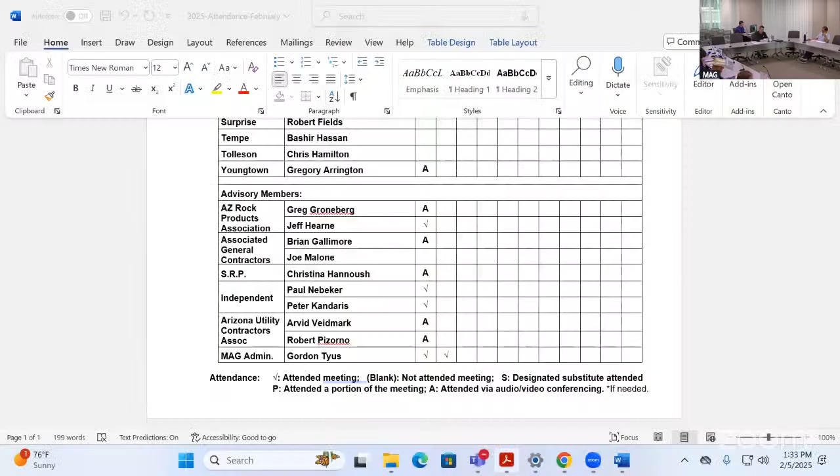We'll move into agenda item number 2, the call to the audience. This is an opportunity for the public to comment on items that fall under MAG jurisdiction that are not on the agenda, informational items, or items on the agenda for discussion and not for action. 15 minutes are provided for the call to the audience unless the chair requests an exception. I have not received any requests to speak for the call to the audience.

MAG also provides an opportunity for members of the public to submit written comments via the MAG website. Any comments received 2 hours prior to the meeting are shared with the committee members in advance for consideration and will be included in the formal meeting minutes. Gordon, have you received any written comments? We did not receive any online written comments. Thank you.

Moving into agenda item number 3, the approval of the January 8th, 2025 meeting minutes. Gordon will pull those up. Refresh your memory if you have any comments or questions, or notes you want to make regarding the meeting minutes. Now's the time to let us know.

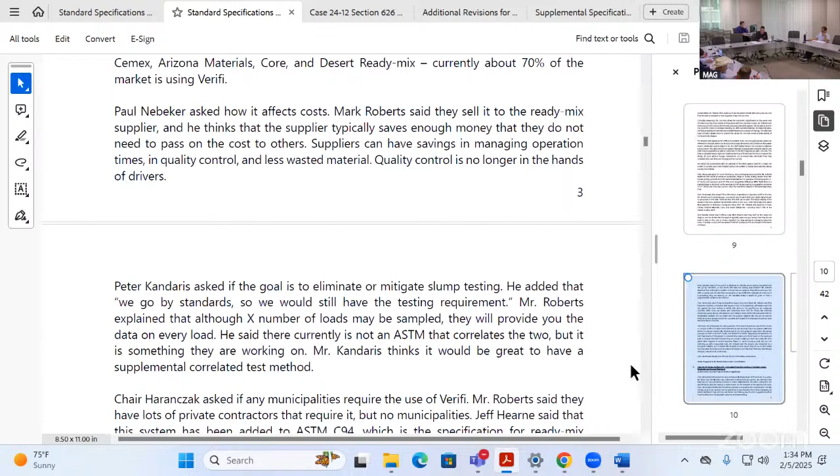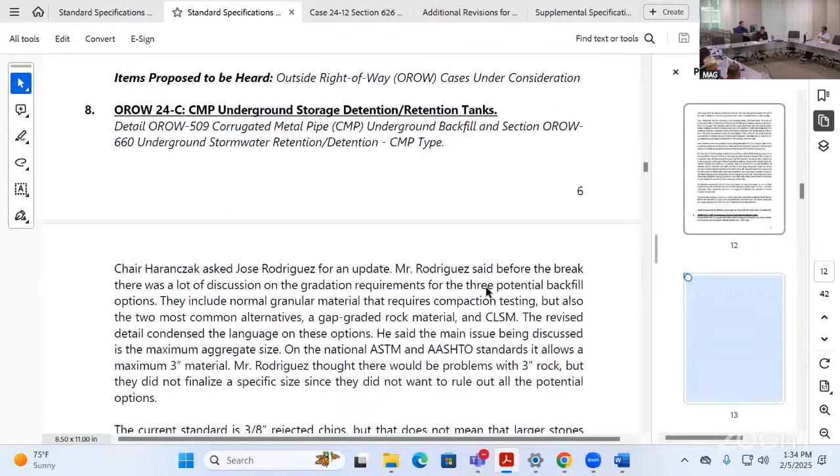I haven't received any public comment on the meeting minutes. Gordon, did we receive anything online? No. Perfect. I'm not hearing any comments on the meeting minutes or any corrections that need to be made. With that, I'll entertain a motion to approve the meeting minutes. This is Warren, I'll motion to approve. Thank you, Warren. Can we get a second motion on agenda item number 3, please? This is Roy, I second. Roy, thank you. With that, we can move into a roll call vote.

Thank you, let's start with ADOT. Yes. Avondale. Avondale's not present. Buckeye? Good afternoon, this is Josh Ford. Yes. Thank you, Chandler. Yes. El Mirage. Yes. Florence. Gilbert, yes. Glendale, yes. Goodyear, yes. Maricopa County, yes. Mesa, yes.

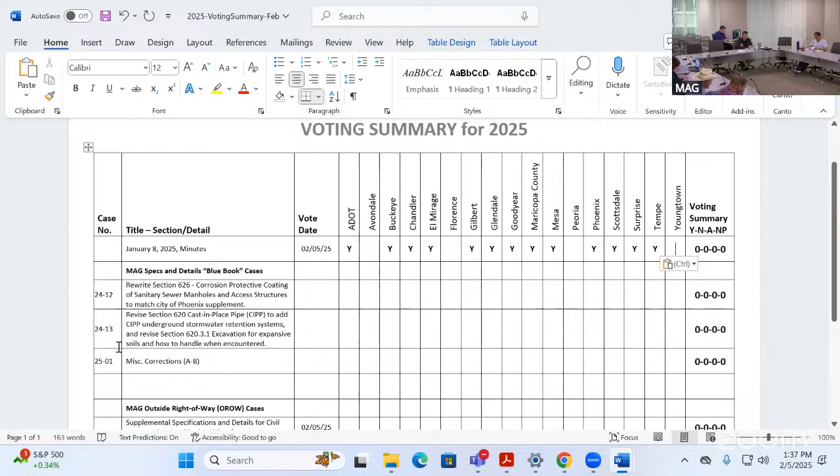All right, we'll move into agenda item number 4. This is cases carried forward from 2024. The first case is 24-12, revisions to section 626 for the corrosion protective coating of sanitary sewer manholes and access structures.

This one in particular, unfortunately, Phoenix wasn't able to make the working group meeting to discuss this. So Jim Badowich and myself had conversations with the Phoenix staff and went over all the Glendale comments. They're going through those comments right now, and they're very small comments. Matthew, do you want to give an update on where you're at with the comments?

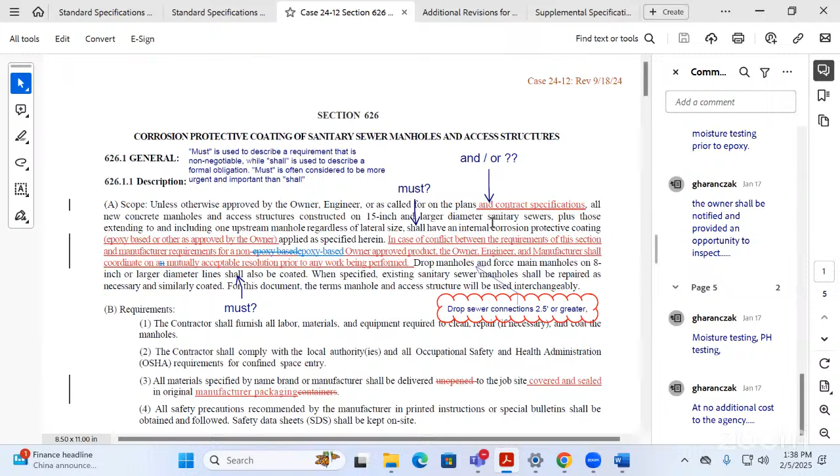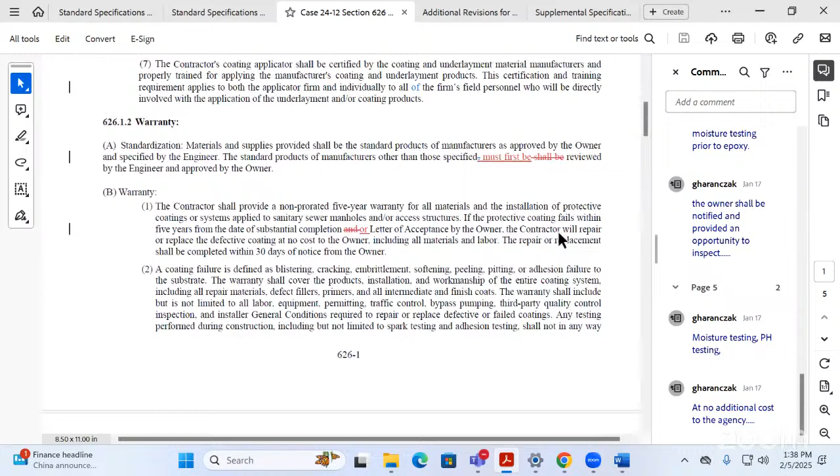Yeah, hello. We're still just revising all those that we had spoken about last week. I haven't heard anything back from Pat, but hopefully we should get a clean version here in the next couple of weeks or so. I did see the City of Chandler sent some of their comments through today, so I forwarded those over to Pat to get those revised as well.

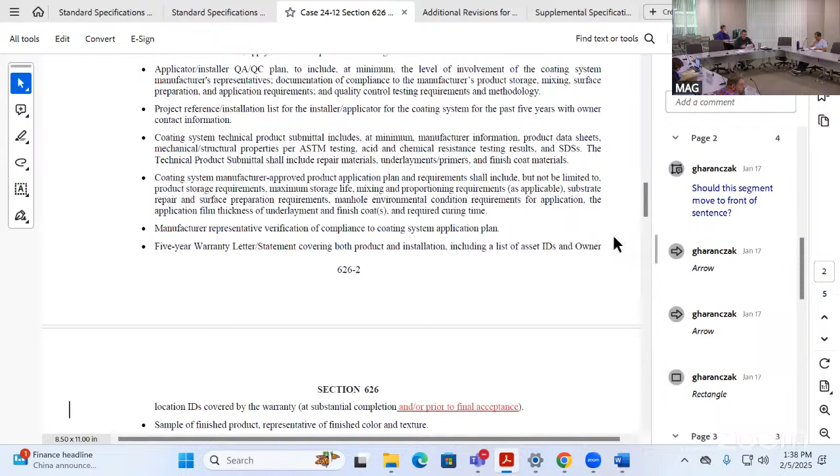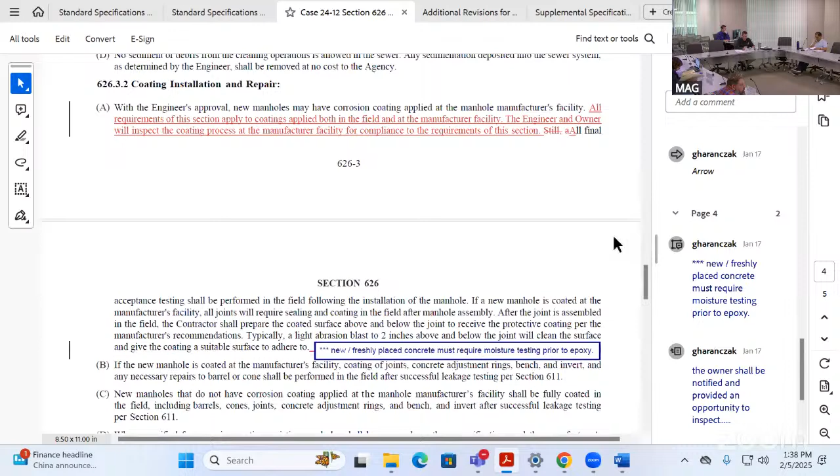Great, that was my next comment, as I saw Warren sent some stuff from their team. Wanted to make sure you got that. Sounds like you did. This one in particular, I think at this point, Matthew, it seems like you're just polishing it up. It's pretty close to going. I think if we can get this in front of the committee this month, the sooner the better, obviously.

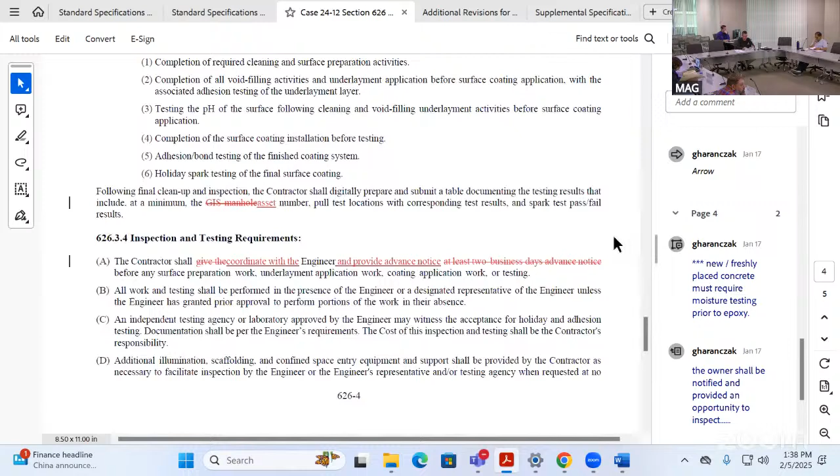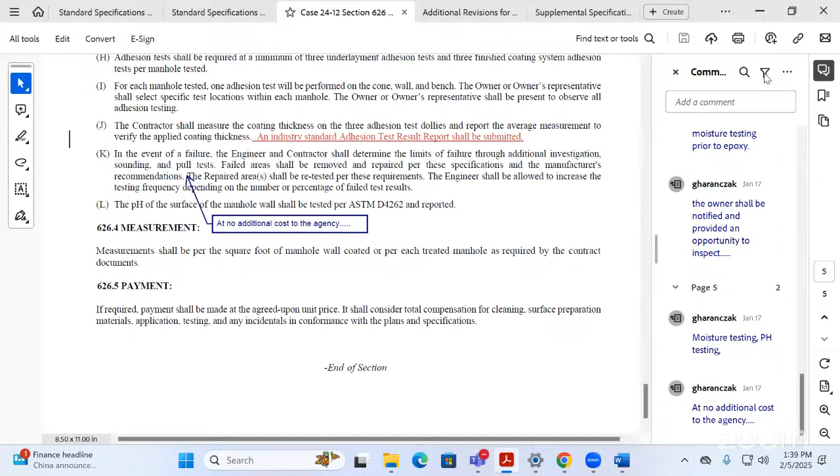We can open it up for discussion at the next meeting. We'll have the working group discuss it, and then we'll open it up for discussion at the next meeting. I think we could potentially put it as action, but definitely in April I think it could be up for action. Yes, I agree with you. Thank you. Any questions or comments anybody wants to make on case 24-12 while we're on this agenda item?

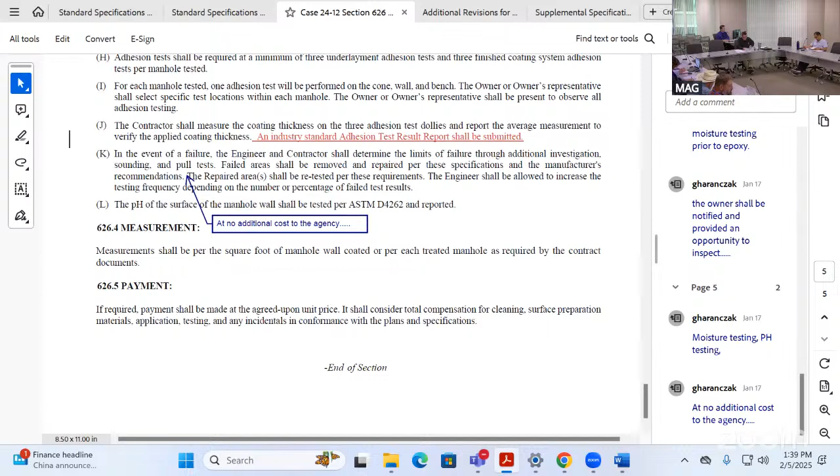All right, hearing none, we're going to move to agenda item number 5. This is case 24-13, proposed revisions to section 620. This is cast in place concrete pipe. We need to make a correction on the agenda. Gordon.

This is to revise section 620.1. It's brought to us by Warren. He's sponsoring this case with Chandler. Warren, do you want to provide any updates on this case?

Yeah, thank you. Good afternoon, everyone. I had submitted, not for the packet, but Gordon should have an update for the additional comments that we had, or the revisions, where basically just to clear up any potential confusion between the cast in place concrete pipe and cured in place pipe. So a few minor changes to section 101 abbreviations, section 618 storm drain construction, and then of course the current case 620, where it's just updating those abbreviations that are used there.

So that's the addition today. The other update is that Blue Corps has set up a meeting for February 13th with their geotech to readdress the ongoing discussions about what to do with the expansive soils. So we'll get that paragraph polished up. Hopefully we'll have that ready, and then we can talk a little more about it at the next water and sewer working group. So that's all I have to report on for today.

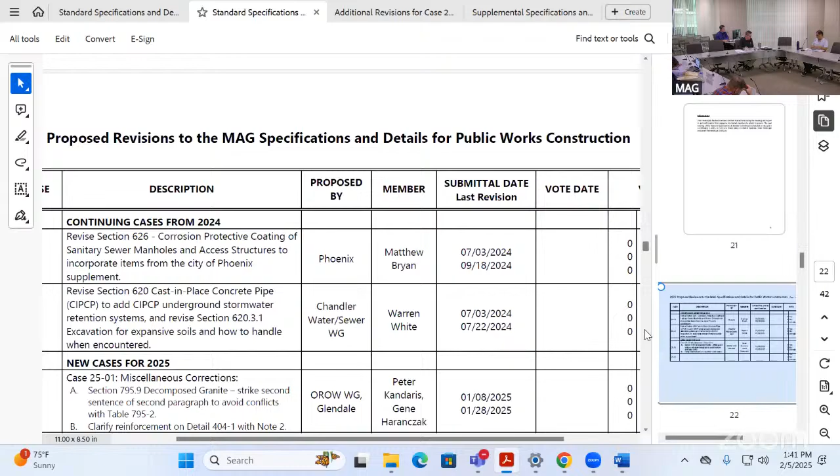All right, we'll move into agenda item number 6, new cases for 2025. We have some miscellaneous corrections. We do have a new miscellaneous correction, this would be for detail 404-1. It's not changing. That should be 404-3, I believe.

Is that correct, Warren? 404-3? Yeah, my agenda says 1, but okay. I didn't catch that earlier when I reviewed the agenda. So we're not proposing to change this detail in any way, just add clarification that note 2 there for the reinforcement required to support the upper water or sewer main encasement, which is clearly drawn on the top section. We just wanted to add that extra note in there. There seems to be some confusion in the field regarding whether or not the bottom is required to have that reinforcement.

Does anybody have any questions on the miscellaneous corrections?

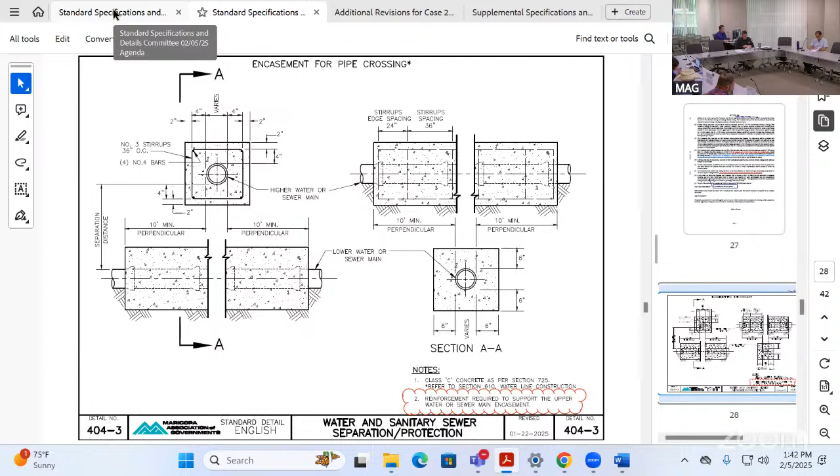All right. Move into agenda item number 7. This is outside of right-of-way. Case is carried forward from 2024. The first one we have is 24-C for the CMP underground storage, detention, and retention tanks. This one's brought to us by City of Phoenix, and Jose Rodriguez is sponsoring it. Jose, do you have any updates you want to provide?

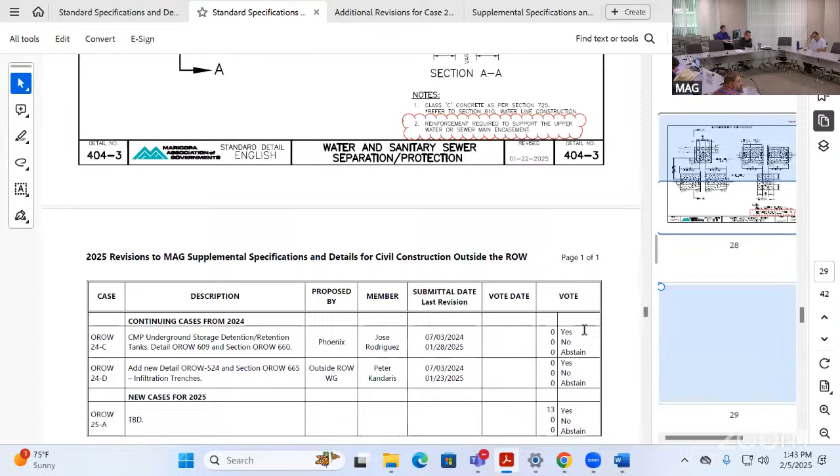Yeah, thank you, Mr. Chairman. This case, unfortunately, I wasn't able to attend the actual working group for the outside right-of-way, but it was briefly discussed then. We did have a follow-up meeting last week between Margaret Conte, Keith Kesty with the City of Phoenix, and myself to talk in detail about some of the comments we received at the last technical committee meeting, particularly in relation to the specifications on the gap graded or open graded crushed rock requirements. We tried to clarify and address some of the earlier concerns about the maximum aggregate size and make a reference to more detailed standards.

We included some of the red lines from that discussion. So in essence, in reviewing AASHTO or ASTM D448 table, the normal aggregate gradation table that most industries require, there's several aggregate sizes designations that are called out that can meet the requirement for the envelope backfill. So it's not as open as it was before. And we changed the description from being gap graded to open graded because that is more in line with the gradations shown in that table, so there's no confusion there.

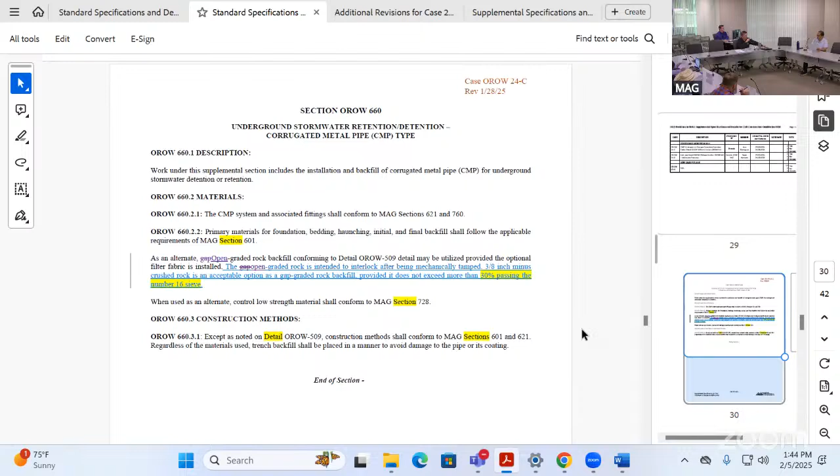Then there was also a discussion about whether or not the filter fabric was needed around the backfill envelope when aggregate base material will be used for backfill. As we discussed it, we didn't see the need for a filter fabric when you are using a granular dense graded material. It's really only when you're using an open graded or gap graded to prevent the migration of fines from the existing edge of the excavation into your backfill envelope. But yeah, that is required to be all around the crushed rock material.

ABC has the tighter matrix, so you don't have to worry about infiltration or migration. And if you think about it, that's what we normally do—we do not put filter fabric when we're using ABC for backfill.

And I don't think that we've seen any failures related to that. I have not.

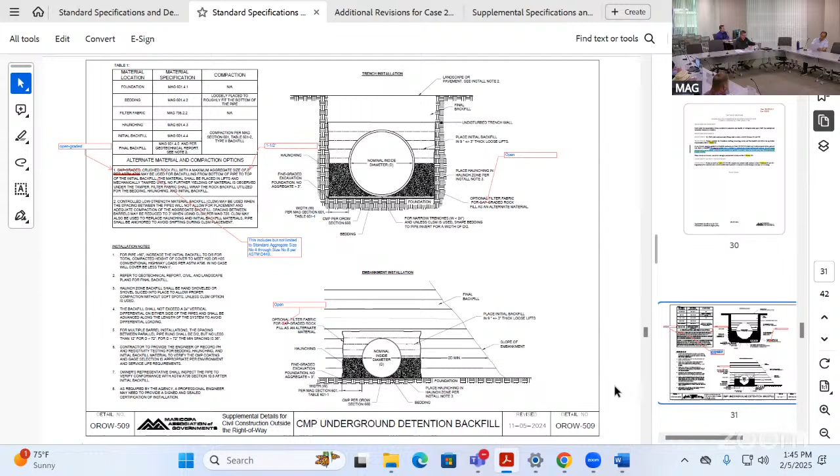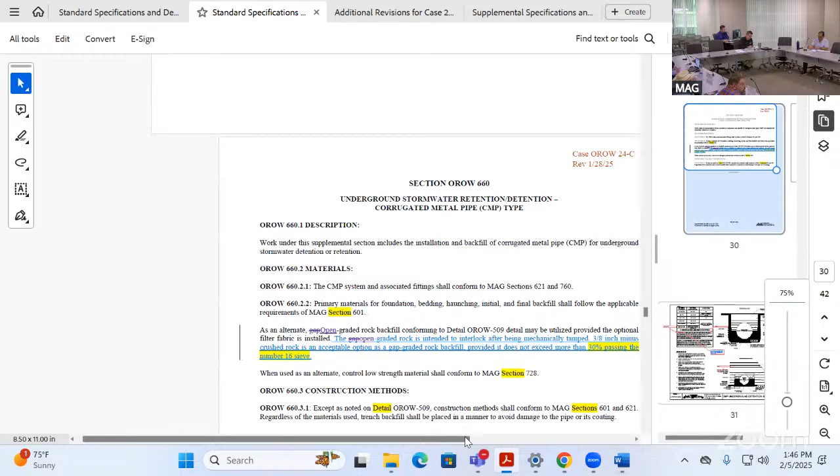And then there's also, I know that the glorious topic related to rejected chips always comes up. Under the specification, there is some language that allows sort of that material with some kind of a specification, particularly making sure that that 3/8 of an inch minus material has at least 30% passing the number 16 sieve.

Jeff, you may know better than anybody else here. I did have a conversation with Greg, but he's not a rock producer of that material. I need to touch base with somebody to see if there's a better way to describe that material, the rejected chips, but so far...

Yeah, instead of rejected chips. Each producer probably has their own designation for it, because it's not a standard kind of material, you know?

It probably is better, if you're interested in a particular performance out of it and the gradation is integral to that performance, to have something in place rather than worrying about a description—actually have some sort of minimum, maximum gradational requirements there, and then who cares what it's called?

Okay, you know, if it meets that requirement, I would agree—like you mentioned, 30% passing number 16, or something along those lines, if you don't want those additional fines in there. But then you have a way to look at it and go, will this, whatever you call it, meet the requirement or won't it?

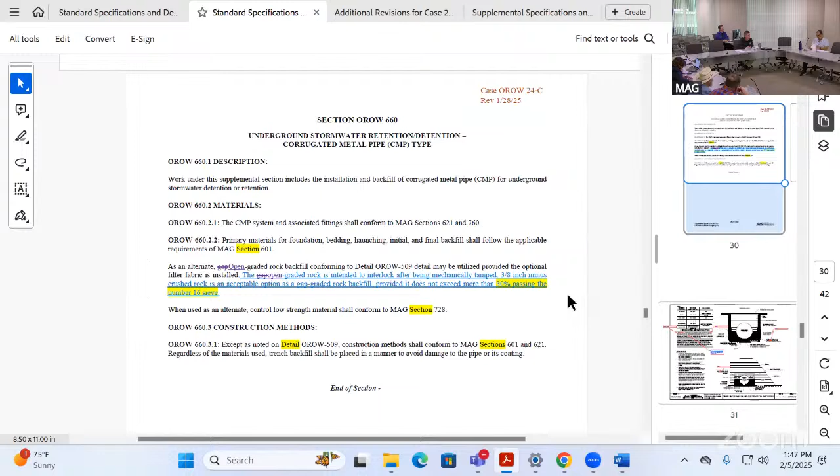So in essence, right now, the way the detail and the specification work together, you can use any of the regular standard aggregate size designations, I think we discussed from number 4 through number 8, and all the combinations in that table, right? Yeah, plus the addition of this rejected chip material.

We just don't want something that has fines that ultimately you would need to compact, right? This is really the one alternative option we're trying to describe—it appears to be a very common industry practice, but it's not very well defined yet.

Most of the time, these materials are crushed. They are a result of the crushing process, and you're screening those out to make the other sizes you just talked about. So they are finer than a number 8 grading, a standard 3/8 kind of number 8 grading. But most of the time, they are crushed materials—they're not sand fines, they're not natural materials.

But off the top of my head, I believe our materials—I don't think that maximum 30% passing the number 16 would be an issue. I don't think our materials have that level of fines in them, because it's not sand, it's just what's left over from the crushing and screening.

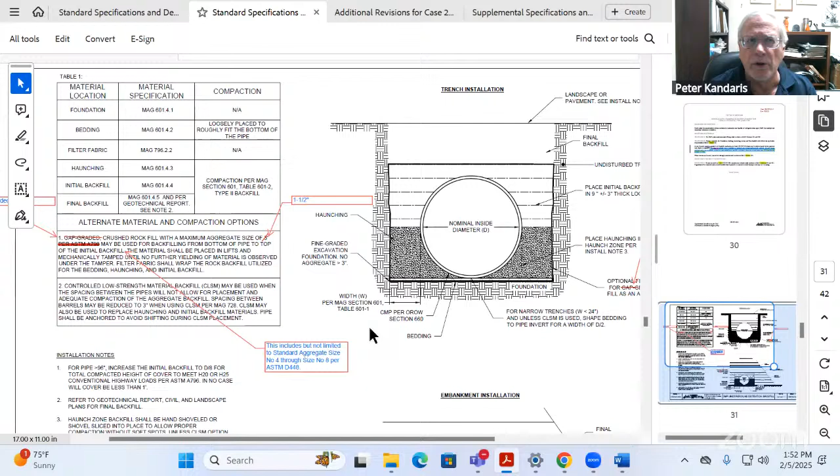This is Peter. I would tend to agree that we may want to put something in the specification component saying that the proposed material gradation be submitted for review - not necessarily approval, but just review - so whoever's getting the material knows what they're getting. Yeah, it's a good catch-all for any of those nuances. I like that, good idea.

Jim, thanks for joining us. This is Roy - just had a question on the detail up on the screen. Since we've reduced the aggregate size, does that also affect the note pointing to the lower left corner of the section, where it says fine graded excavation foundation, no aggregate greater than 3 inches?

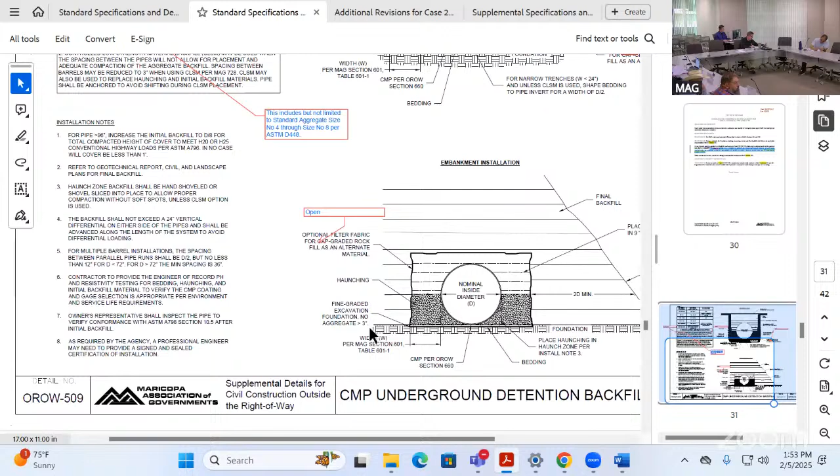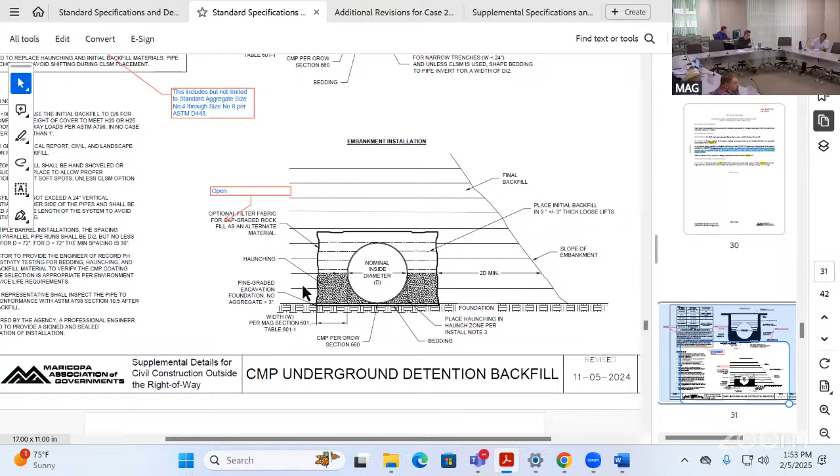Oh, good catch, sorry I missed that. Scroll up just a little bit - it's almost in the center of the screen, on the top left. Up a little more, keep going, it's narrow and it's on both the top and bottom detail. Just above the title on the bottom of the detail. Right there, down with your cursor, to the right and up. There you go, to the left a little bit - that's the note. Yep, and there's the same note for the sketch above it. Correct, it's on both the top and the bottom. Good catch, Roy.

This is Warren, just a question on the callouts for the foundation and the bedding. Trying to remember, is that matching our 601 definition? Because the foundation is below the bedding, correct, as labeled? And then the bedding would be right below the pipe on top of the foundation, correct? Correct - foundation is pretty much the bottom of your excavation, but yeah, it follows the same outline as 601.

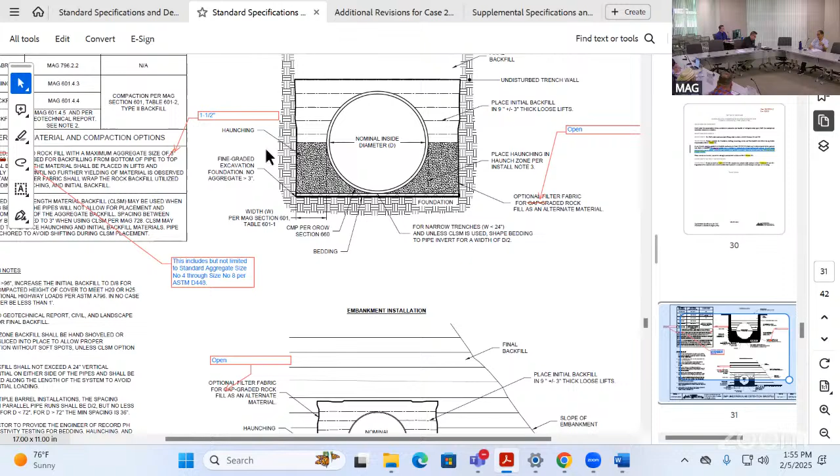But what kind of bedding are we using below the pipe - what kind of material, is it just laying on the foundation? No, you still need a bedding material. It's based on the 3 options we have. Going back to what we've been discussing, if you wanted to perform the installation using dense graded materials, it would be similar to your ABC material. If you're using crushed rock, you have to set up a bedding that's going to conform to the bottom of the pipe - the material is defined in the table.

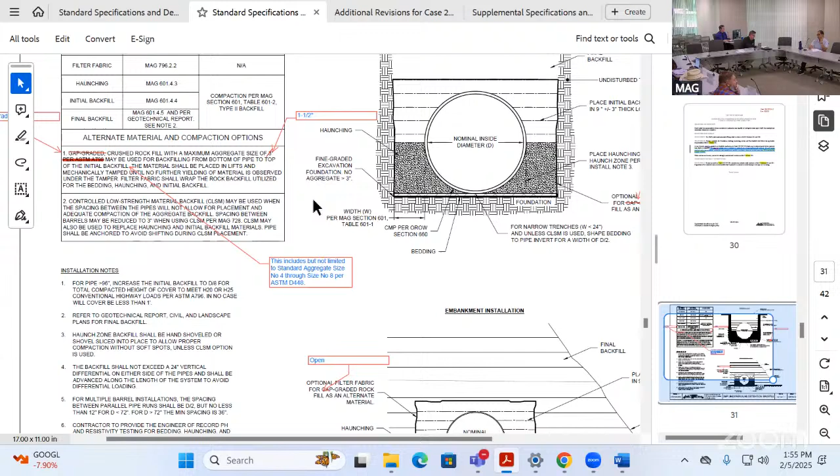That makes sense, I didn't see it all, I hadn't studied that one. I was just making sure where we call out over on the left, it says foundation, fine graded excavation foundation, number 3 - is that... maybe I'm just confused. No, it should all follow the same requirements, so I can clean up. Okay, thank you. The trench section is also detailed and called out in 200-2, I believe, as well.

Anybody else have any comments or questions or notes that they want to point out on this specific case?

Hello, this is Josh Ford, City of Buckeye. Couple of comments.

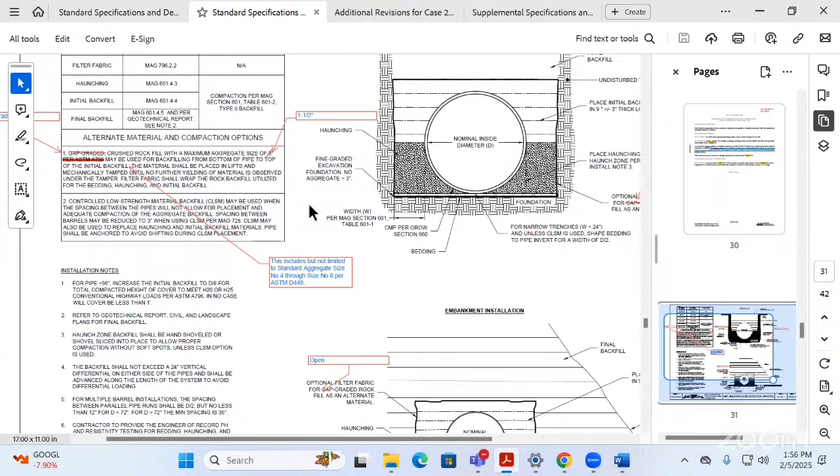Looking at the trench installation detail on the top, there's a call for final backfill and then landscape or pavement, see install note 2. I'm guessing install note 2 would probably be more appropriate to associate with the final backfill call out, since note 2 says refer to geotechnical report, civil and landscape plans for final backfill.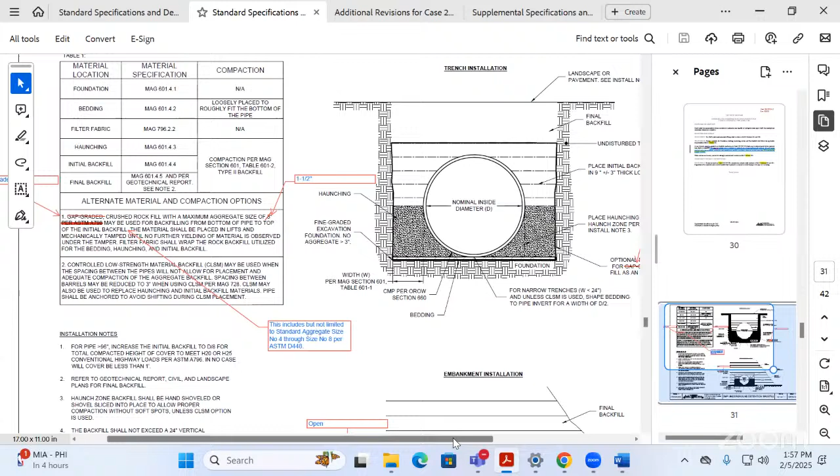And then, question: do we clearly show somewhere how far above the pipe we take that initial backfill? I'm seeing a note under installation note 1 that seems to talk about that, but in a detail with section views like this, I would almost expect to see something above the pipe indicating the limits or height of how far up you take that initial backfill.

Like for instance, 1 foot above top of pipe as an example. Is that what you're saying? Sure, yeah, or 1 foot minimum, or somehow.

We can add it. That was the reason I guess we didn't do it initially, because that's all defined in 601. But we can certainly add it in the detail for, I guess, more redundancy than anything, Josh. Or follow the requirements of 601, just in case somebody comes up with something different. Yeah, I think what Josh is asking for is a little bit of clarification. Okay.

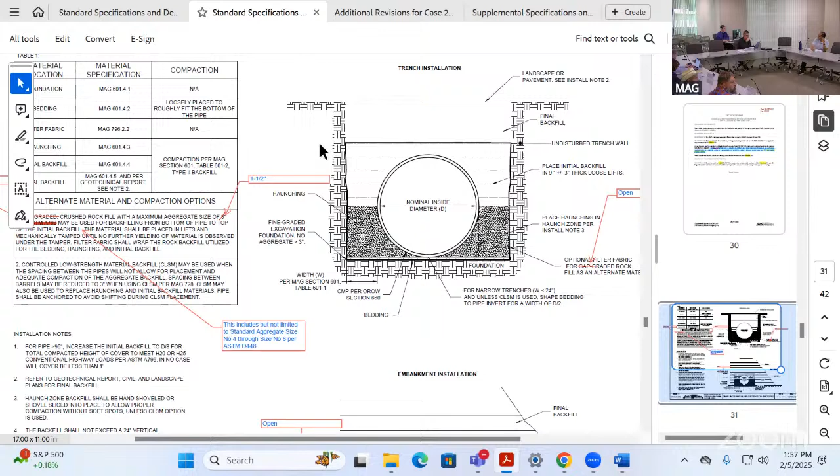And then, with installation note 1, when we're saying for pipes greater than 96 inches, increase the initial backfill to D/8 for total compacted height of cover, what are we meaning by that part of installation note 1?

So there's a couple of different things going on towards the top of the detail, regarding the final backfill, and also the landscape and pavement requirements, because final backfill can potentially depend on whether this installation is going to be outside of a parking lot area, or in an area not subject to traffic. That's why it's identifying what the final backfill limits are. But you may have different conditions particular to a project, especially towards the top. If you're in a landscape area, you may not need all the compaction requirement that you will if you're underneath pavement. So that's where we can't go to the point of actually specifying those limits.

What note 1 was really intended for is just to talk about minimum cover, the minimum cover installation for this product, as defined from the top of pipe to the finished grade surface. I see your point. Yeah, that note 1 can clarify that it should be to the finished surface.

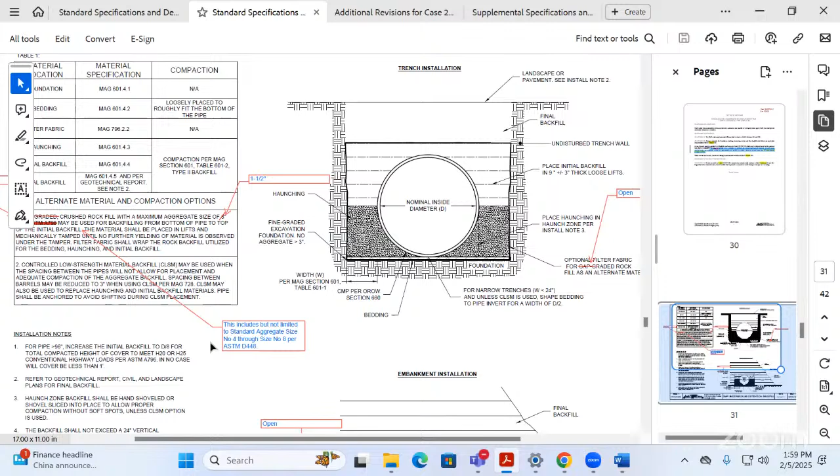So, or I can clarify that. It just isn't clear to me when we're talking about increasing initial backfill to D/8, where we're saying that D/8 dimension would be as it relates to the initial backfill limits. I follow now. Yes.

Okay, thank you, yeah, thank you, Josh. Appreciate you bringing that up. Yeah, good comment.

Anybody else have any additional comments for this case? Jose, the case sponsor, Jose Rodriguez, will look into those and make those corrections, probably discuss it with the subcommittee and make... what we'd like to target is to hopefully have a cleaned up version with all the comments by the next meeting, and move for information and action next month. You want to go for possible action? Okay, we'll put it on the agenda for possible action.

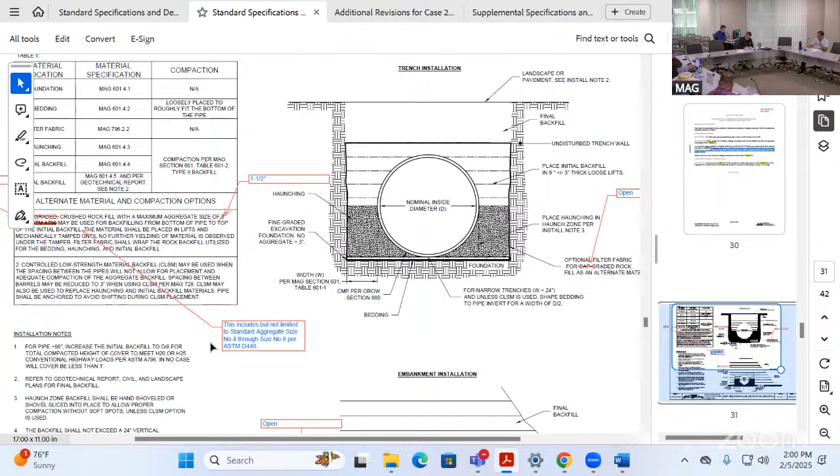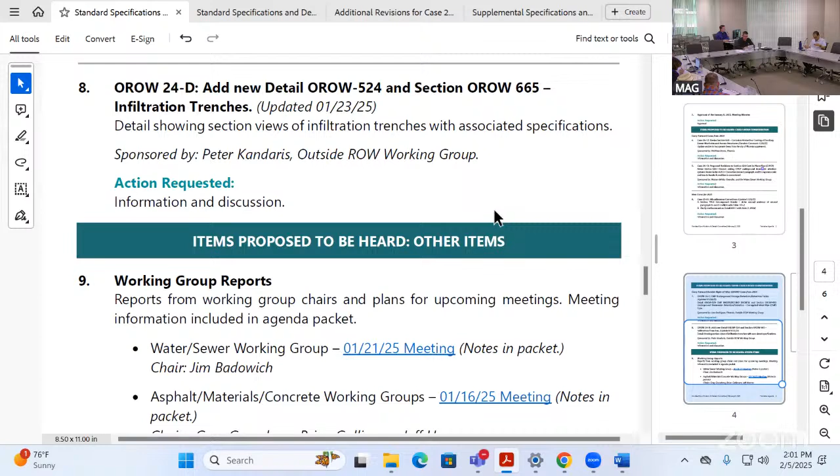All right, we'll move into agenda item number 8. This is outside of the right of way 24-D, for new detail 524 and section 665, infiltration trenches. Peter, you're heading this one up, is that correct? That's correct, Mr. Chairman.

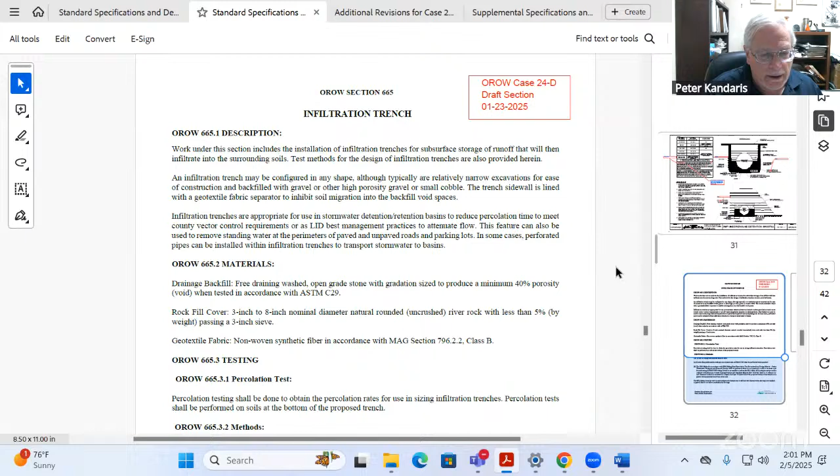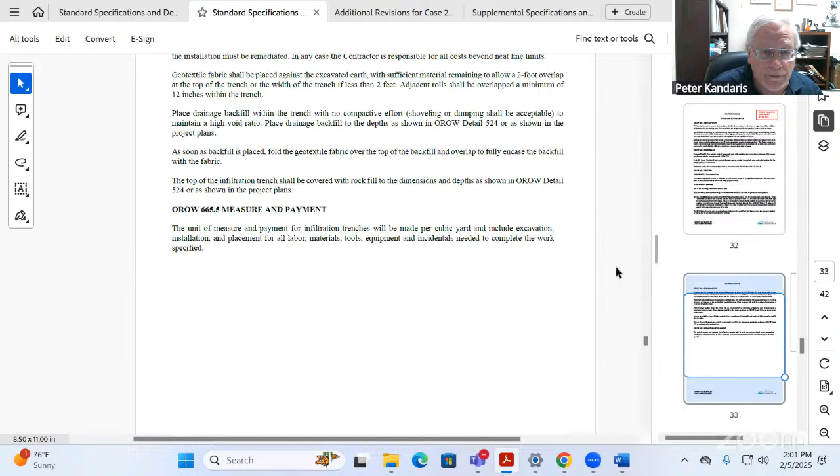The draft that you have is the cleaned up version, with the typo corrected in infiltration. I think that was the only change in the text component of the case. The detail itself is now in a CAD version. It incorporates the red line markups from last time, which were primarily Note 8 added to it. So now it's just cleaned up as a CAD version, looking a bit more final. No other comments have been received, so we're at the point of waiting for additional comments to move forward with the case. Do any of the committee members have any comments on this case?

Peter, do you think we could put this one up for possible action then, since we're not getting any more comments on it for the next meeting? I would like to see us move that way. That would be nice. We'll put this for discussion and possible action for March's meeting.

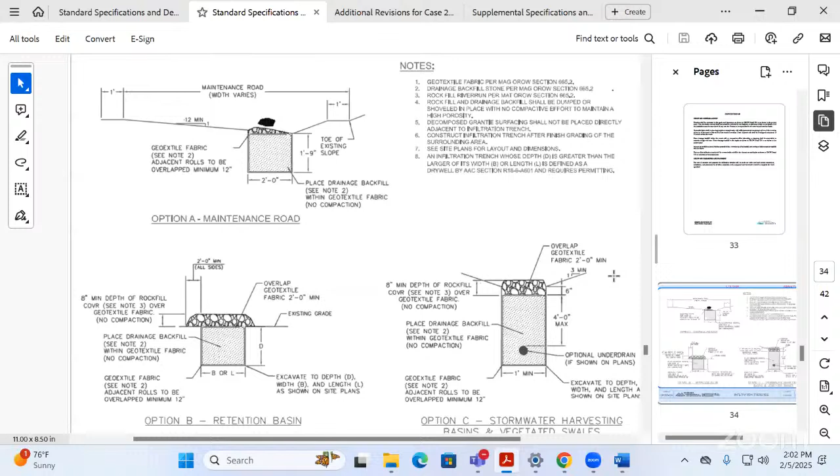That'll be the only change. That was a good test, Peter, just to see if we're watching. Good job. Yeah, again, I don't remember much anymore, so I'm glad for all the help. That's right, thanks for making sure I was awake. Me and my lack of CAD skills. Well, they're better than mine based on what I see.

All right, anything else on this case before we move on? All right, hearing none, we're going to move into agenda item number 9.

This is the working group reports. We'll start off with water and sewer working group. We'll get a report and the plans for upcoming meetings.

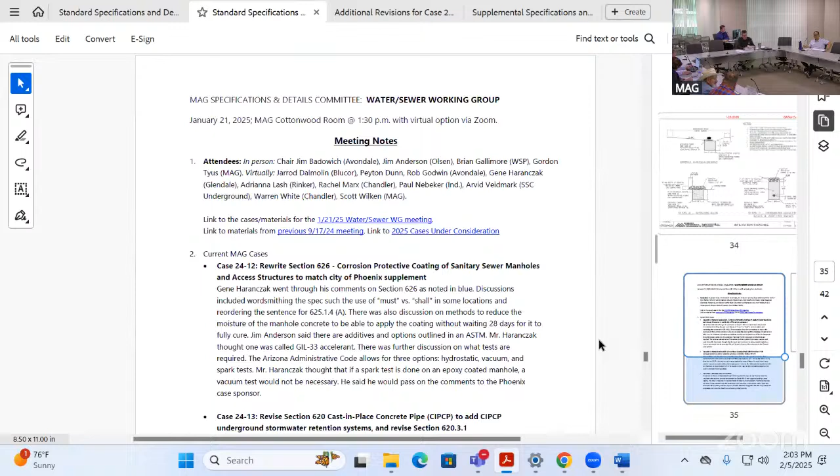Jim Badowich: Yeah, thanks, Mr. Chairman. So we met on January 21st. It was a combination, in person and virtual, so I was there. We had a few people turn up.

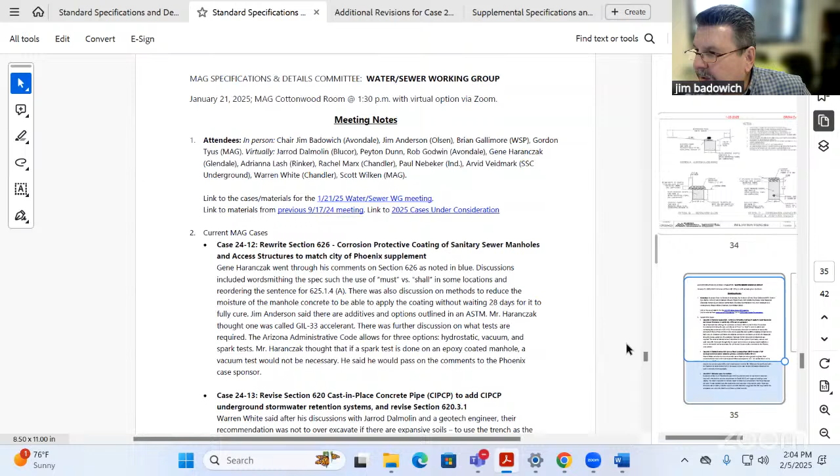So we went over some of the current cases. We had some discussion on the corrosion protection coating of sanitary sewer manholes. I think we've talked that one quite a bit, so thanks for that other auxiliary meeting we had, Gene, on that. Yeah, you're welcome, it was a good discussion.

Then we talked about revisions to cast in place concrete pipe for underground stormwater retention, case 2413. We had a pretty good discussion on that. One thing we talked about is the soil is rocky, but over excavation - it can be used in a lot of situations, but there might be instances where it's not feasible to use it. I don't know how you put that in a construction spec, guys, but the design engineers, you got to get into geotechnical stuff so you can make an informed decision on something like this.

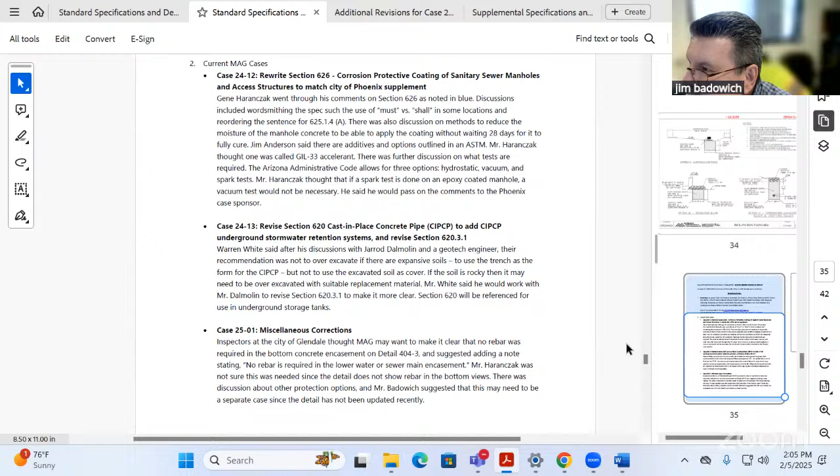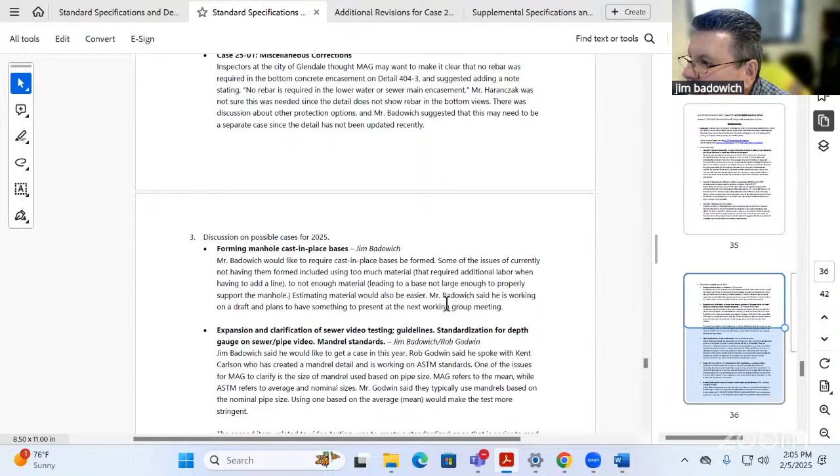And then we had just some miscellaneous corrections. Gene, you brought up an item about concrete encasement, putting rebar in it, clarification of the note. Yeah, I don't know, I think that may be more of a detail than a miscellaneous item. Just in the past, we see stuff like that, it kind of qualifies for a new case.

And then we kind of discussed some of the stuff we're going to be working on this year. One of the things I'm going to bring is requiring cast in place manhole bases to be formed up.

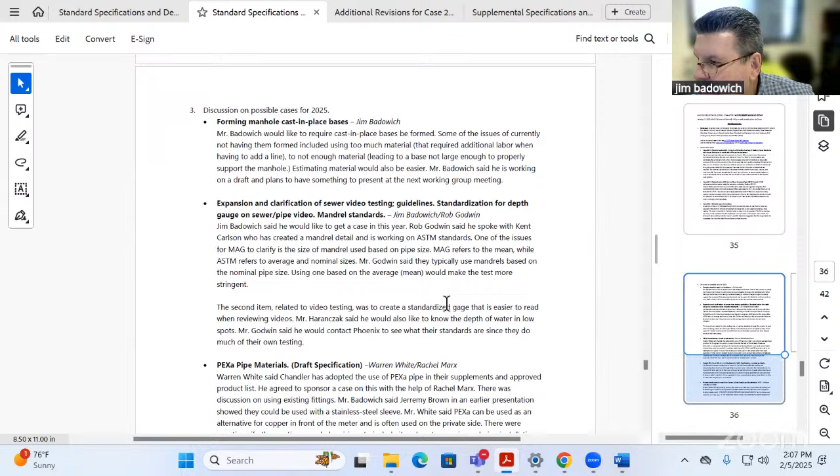I think only one or two agencies still use a more stricter one. We've been using the average, and I really haven't had a problem with it. After years of going back and re-videoing it, we haven't had any failures. So I'm not sure the more stringent one is really necessary. But we just got to make a decision and agree on it. I think one standard should work for MAG.

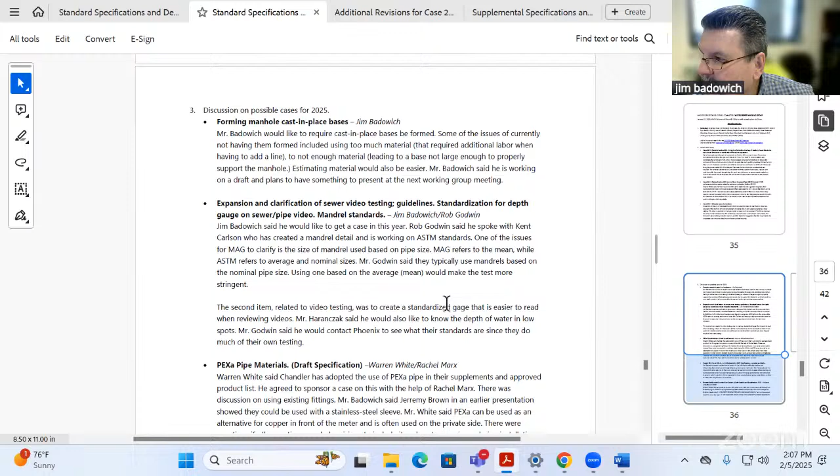The other one coming up this year, and thanks again to Warren for taking this on, carrying with it, is the PEX as an alternate material for water services in the right of way. So you're going to see that as a case here shortly.

The other thing we want to talk about is cleaning up details 301-1 and 303-2, clarifying some terms, especially LR and LRN. There's always confusion on that, so we want to clean it up. Some design engineers call out the actual distances on the plans for restraint, but sometimes they don't and leave it up to the contractor, who then gets with the inspector, and everybody's scratching their head. So we need to make this detail easier to understand.

I'll provide more information when we get into agenda item number 11 on that. We're also probably going to have another case for a precast reinforced concrete box culvert, similar to ADOT, just having a detail for that, and it needs to be for the precast box sections.

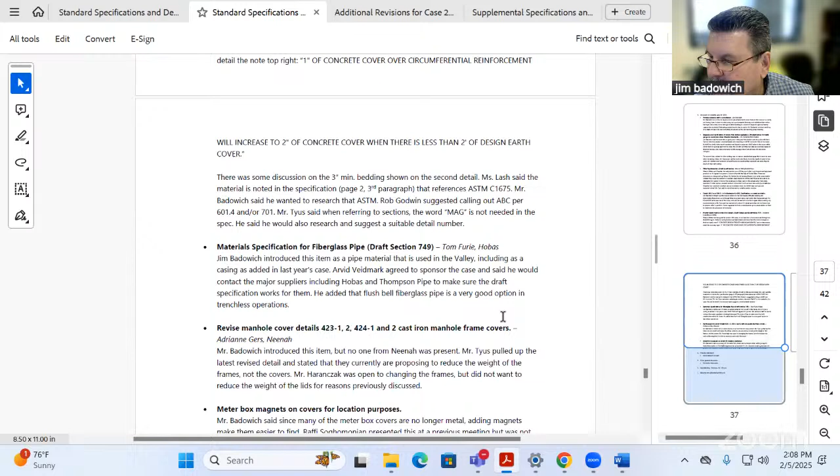Sounds like this working group has the work cut out for them, Jim. Yeah, we've got some good people, so we just need a lot of work, but hopefully we'll get it done.

Fiberglass pipe is another option for a new section for 749. A lot of people have already been using this spec for various sewer and storm drain applications, so Arvid has agreed to sponsor that case.

I don't know if we're going to see anything on manhole covers. There's been some interest, and maybe on the frames you might see changes, but I think the covers are going to stand as is for now—if it isn't broken, don't fix it. But I understand the industry has things for modernization, so we want to look into it, but it may not amount to anything.

The other last one, should be an easy one, is for locating purposes—putting meter box magnets on some of these lids. Everybody's getting away from all-metal lids and going to polymer concrete boxes like we are in Avondale, and sometimes they get buried and are harder to find. These box magnets will go in the lid, they're relatively cheap, and shouldn't be a big thing. So we're going to just modify the detail on that as an option, if the agency wants to do that. That was about it.

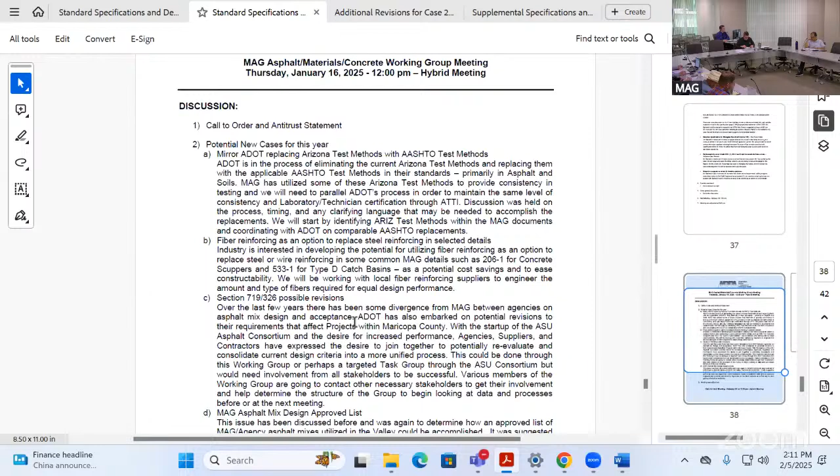Thanks, Jim, for that update on the Water and Sewer Working Group. We'll move into the Asphalt Materials and Concrete Working Group. Jeff, you want to give us an update? Thank you, Mr. Chairman. A write-up of the committee work is in your packets, but items A and B we discussed at our last Standards Committee meeting as potential cases for the future.

One of them being ADOT moving from Arizona test methods to utilizing AASHTO test methods. So we've begun devising a method to our madness to try to figure out what they're doing and how they're doing it. Our aim is to try to mirror what they're doing—we don't want to be ahead of them, but we don't want to be too far behind them either, so we've got to take our lead from them a little bit. In the meantime, we can identify what's in the existing MAG standards so we know how much of it we have to do.

The fiber reinforcing thing, item B, is another slow process we're working on. We want to try to introduce some of those fibers into some of the details, and we're working with a couple of the fiber manufacturers to help us do the engineering and calculations involved, to determine what the details would look like, what kind of fibers, and what dosage rates, so we could bring that real information back to the committee to look at.

We had quite a discussion over section 719 and 326. The industry in general is having discussions about trying to get back to a centralized way of doing mix designs and approvals. It seems like the valley has kind of spread—this isn't my area, so I'm talking off the cuff here—but things have started being done differently between City of Phoenix, the east side, and Maricopa County themselves, and then the west side cities are trying to do what City of Phoenix is doing but making some modifications. We've kind of gotten away from the whole concept of what the MAG standards are supposed to be—a unified way of doing things. I'm a concrete guy, not an asphalt guy, but I get it.

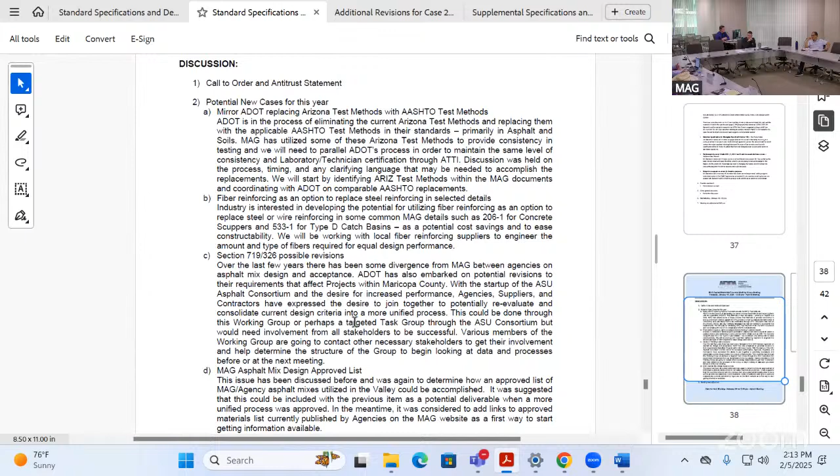It's important that we got good buy-in from City of Phoenix staff who attend the working group meetings as wanting to be part of it. Some of our members are going to approach East Mesa and see if they can be part of it. We can try to put this together maybe as part of the ASU consortium. I don't know how it'll work out, but we'll try to get the parties together and have these conversations, so that at least as we make changes, we're going in the same direction if we can.

So that'll be interesting. I would encourage any of your technical staff that want to be involved in this to please be involved as part of the working group to have these discussions, because we get a lot of things done in there. These discussions are very open, and it allows us to look at the different methods being used and try to determine a unified way to do some of these things if possible.

That's a good idea. I'll get Rob to attend that, but the consortium sounds really interesting with ASU. So I would encourage you guys to look at the consortium. They definitely are looking for more involvement of agency staff. The idea there is to try to bring the latest technologies, the latest information, performance criteria, those kinds of things into the valley, without having an axe to grind one way or the other - it's just informational, so people can get together and have those discussions. And it's geared basically toward asphalt.

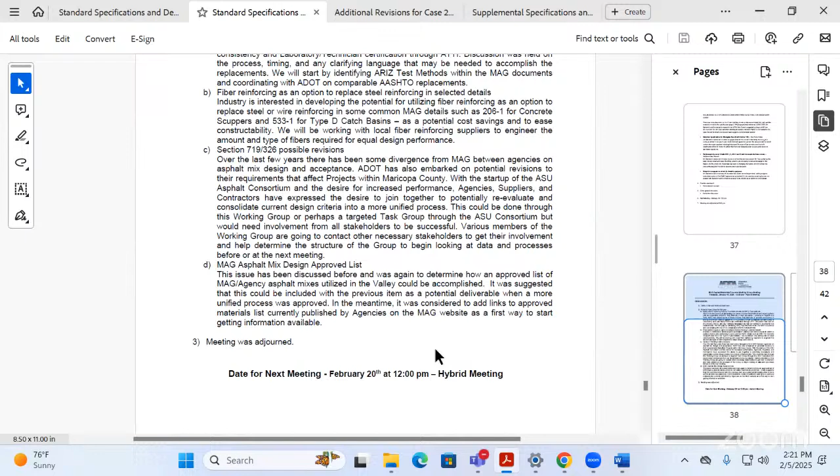All right, thanks - and that's generally Teams, at 10 o'clock or noon? No, it's at noon. Okay, yeah, 12 noon, February 20th. If you show up in person, there's food to eat. If you don't show up in person, you're on your own. We're gonna have a meeting during lunchtime. You need to provide lunch - we'll bribe you to be there. That's all right.

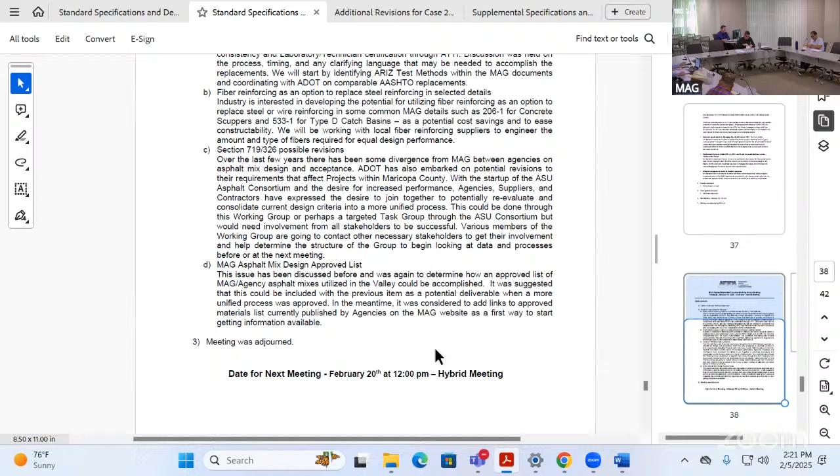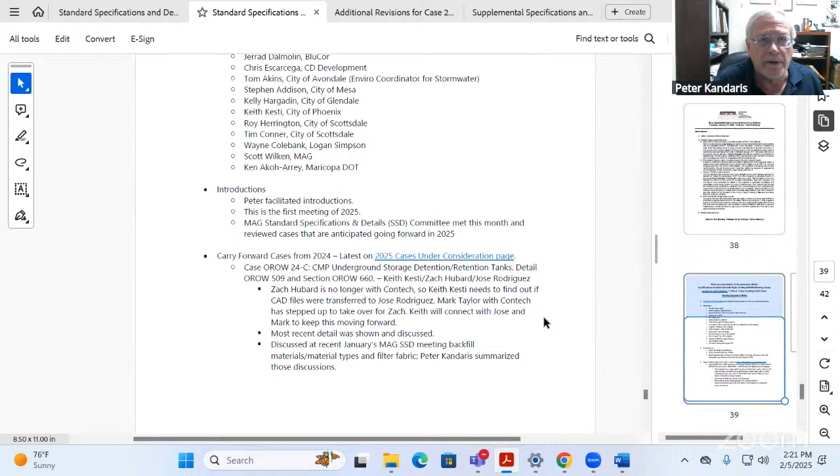Peter, do you have an updated report? Yes, Mr. Chairman, thank you. You see the one on the screen there, it's in the packages. Again, a very well attended virtual meeting - we got quite a bit of input this time.

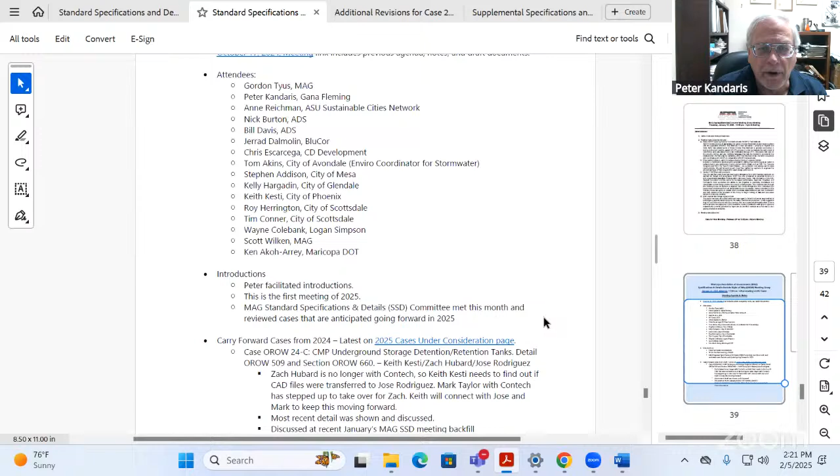We've talked about the carry forward cases, so I'm not going to go back into those - I think those have been updated, so let's talk a little about the new cases. The miscellaneous corrections case 25-1 started a new discussion on whether we should look at the entire section of 795.9, decomposed granite, and update that. There was quite a bit of discussion on that, and I think what we're going to do is prepare a new case to bring forward to the committee for an update. Basically, those materials have not been changed in a long time.

The miscellaneous cases is in and of itself fine, but we started looking at whether this is a standard material. Have those materials changed? The sources were identified as being changed.

So what we've done is not have an official group, but a sort of semi-official group to start looking at what materials are being produced right now in the valley, so we have a balance of what is there and what we're speccing out.

The second item brought up was from the City of Glendale, Kelly, who was looking at specifying a slope stabilization decomposed granite, a large enough size material that would help reduce erosion on slopes. We said that sounds like a great opportunity, so several members of the working group volunteered to look up information and contact other people to see if we can provide a new material that would meet City of Glendale's requirements, and probably a lot of other cities, for slope stabilization.

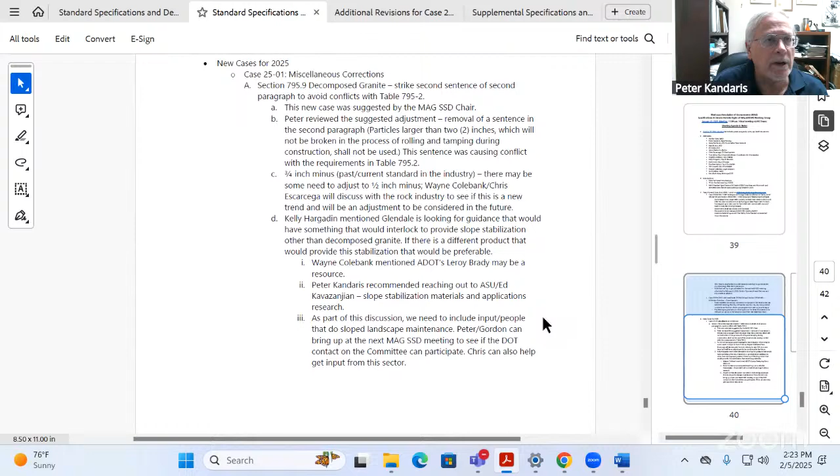We went through, as discussed in our prior meeting, the supplemental specification document itself. The draft was shown to the working group and they were notified this was in process. So we had the same discussion we had at the last meeting, but presented it to the working group.

Let me talk about potential new cases. We're moving forward with the stormwater harvesting case. Tim, Wayne, and Roy are working on that along with the other cases that came forward with the infiltration trench case. All of that can now be blended into how we make the pieces of the orchestra work together in a single detail. Another one would be the detention tanks.

Now that we've got the CMP type tanks, we're going to start moving forward into cast-in-place, which is Bluecor's work. There's also now motivation to look at other materials, plastic type materials, concrete materials, and such different options. So anticipate sometime this year we'll be submitting cases parallel to the CMP, but for other types of materials, just as details moving on and adding to the specification. Once we get one done, we can start on the rest.

The other case I brought up: when we did the spillway detail, I noticed there are details in the current MAG standard, particularly outside right-of-way, dealing with scuppers, spillways, and curb cuts that are cross-referenced, but we never got that cross-referencing quite straightened out when we did the spillway case last year. So I've gone through and we're working on markups to the existing MAG standards to reference those properly, so everything is cross-referenced appropriately between them.

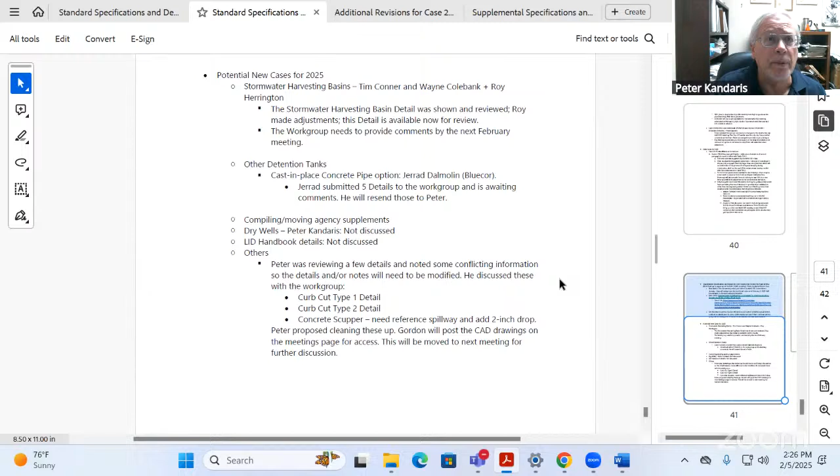Oh yeah, we also talked about the other underground storage cases, the decomposed granite, and the polymer specifications on equestrian trails. That may not be a good material, since the decomposed granite with polymers apparently degrades fairly quickly on equestrian trails, so there may be another alternative or option for that. That's another item thrown into the decomposed granite review, which opened up a whole broad area of upgrading that whole concept of decomposed granite, how we use it, different applications, materials, and stabilizers.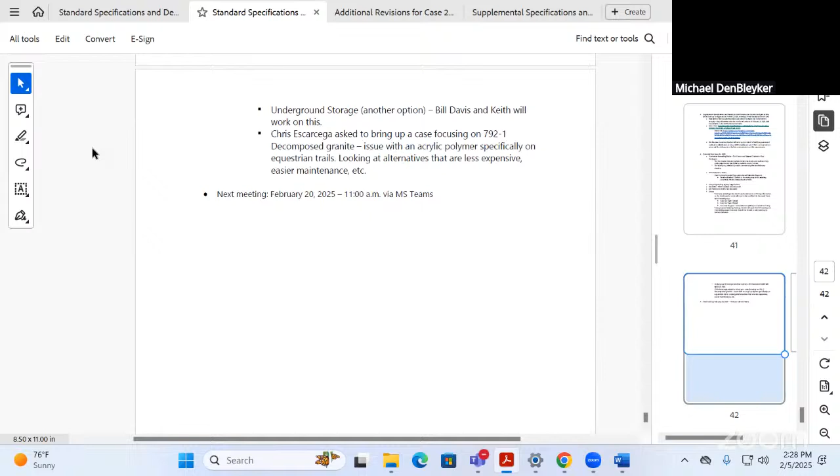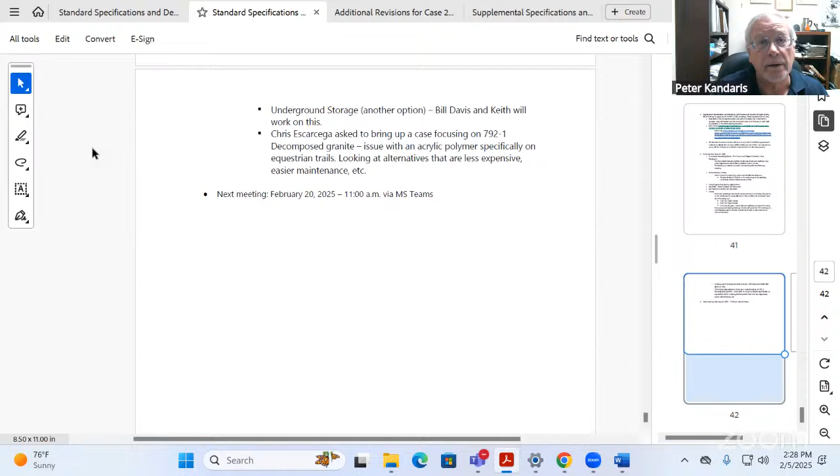This is Mike DenBleyker from ADOT. I know you mentioned Leroy is a valuable resource. If and when you need to reach out and coordinate that, please let me know and I can help facilitate, but feel free to reach out to him too. If you could, through this or through MAG, just send us his contact information, his email, whatever, so we can loop him into this and get him pulled in. It'd be great. Sounds good. Thank you for offering that up, Michael.

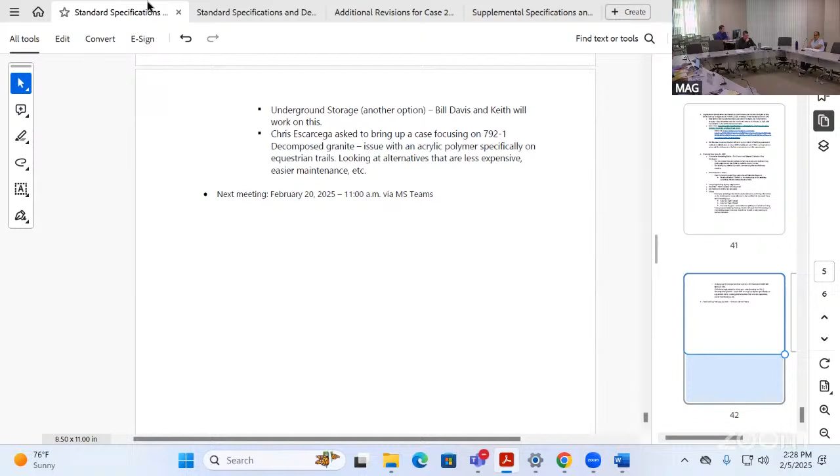All right, we'll move into the ADA working group. This is a Teams meeting planned. Warren, is it you or Jose that's heading up this group? It's Jose. We're co-chairing it, right Jose? Co-chair, he's a great wingman, this Jose. Go ahead, you want to give us an update on this, Warren?

Sure, I'll have Gordon help us with the dates and all. I know he's done the legwork to get the emails out and assemble the attendees, at least send out the email for the meeting. So Gordon, you want to just give a quick briefing on that part, please?

Sure. Well, we had a few people volunteer from the committee, and then several of the committee members volunteered someone at their agency that they could join. So I got some emails that way. I know, Warren, you supplied a few people from industry that were able to help out, and I contacted a few people that participated in the past. So all told, we got about a dozen people who are interested in this first meeting, which is scheduled for also February 20th, I believe at 2:30, if I remember right. And it's also going to be a Teams meeting.

And thank you for setting up the Teams meeting. That will make it easier if folks have anything to share, since we're kind of limited on the Zoom option, right? Right. And also I've got the list of people on a MAG mailing list, so we can add to that list and automatically plug them into any future meetings if we need to.

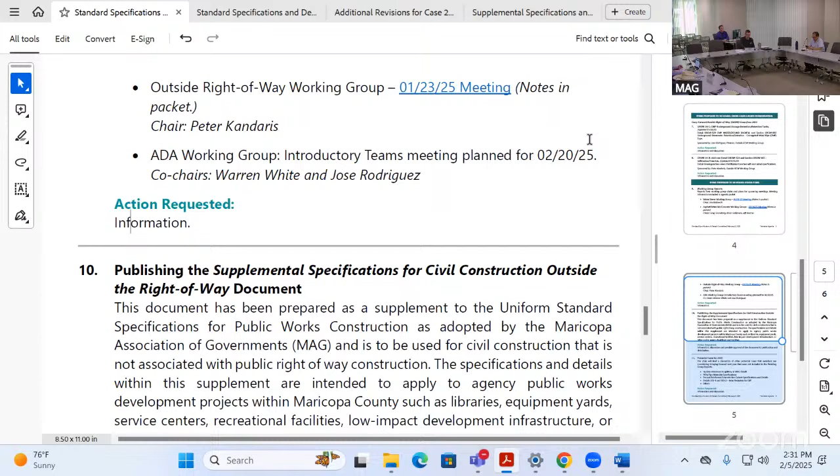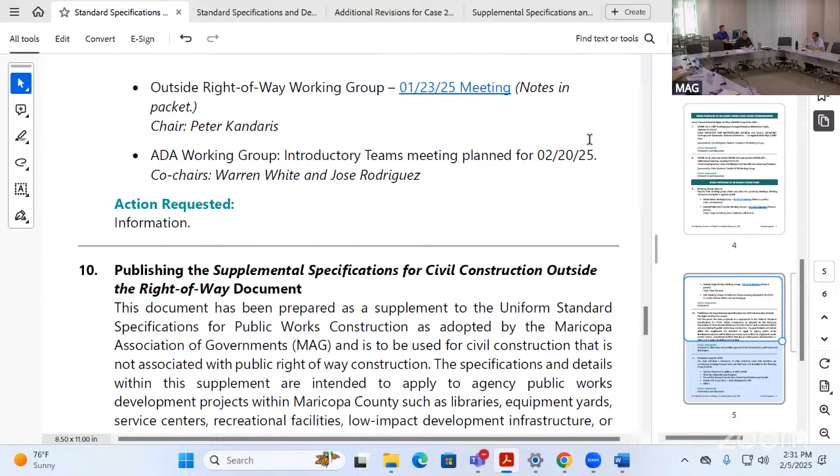Yeah, I'm anxious to see how all this evolves with the ADA working group and what you guys come back with to the committee. That's going to be February 20th at 2:30. Thank you. You have anything else, Warren? Well, that's it for now. Thank you, all right, I appreciate it.

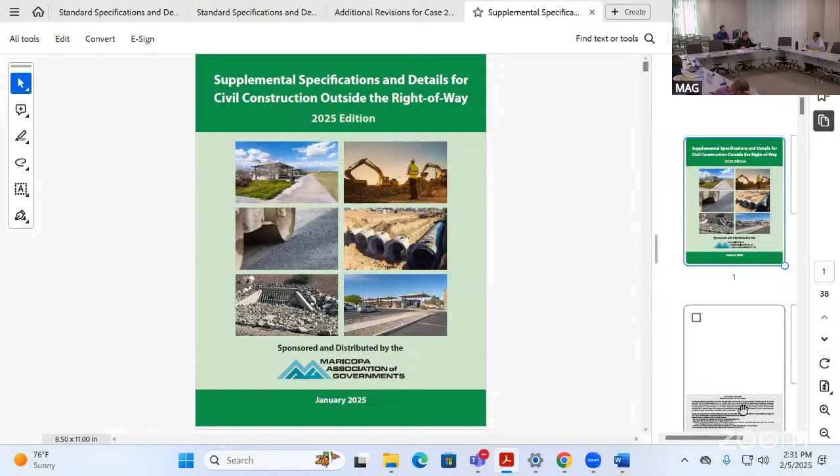We're going to move into agenda item number 10. This is publishing the supplemental specifications for civil construction outside right-of-way document. That's the beautiful green document dated January 2025. Hopefully everybody's had an opportunity to go through this document and are comfortable with the layout and having this thing published. Is there any, I'm going to ask right out of the gate, is there any opposition to publishing this document?

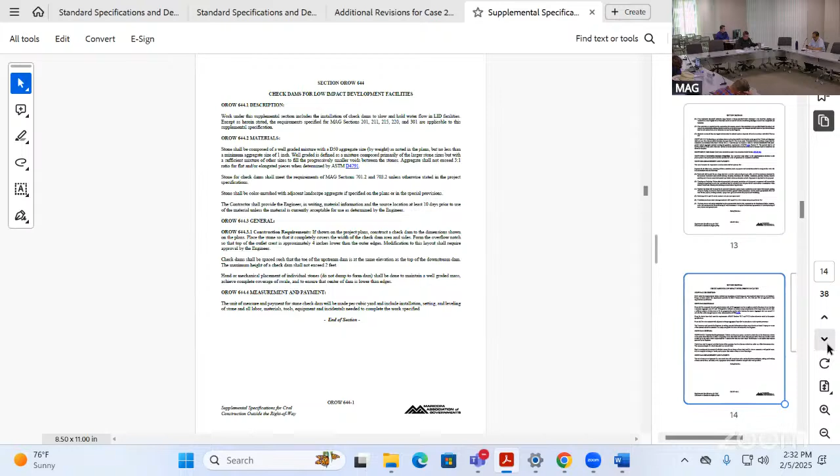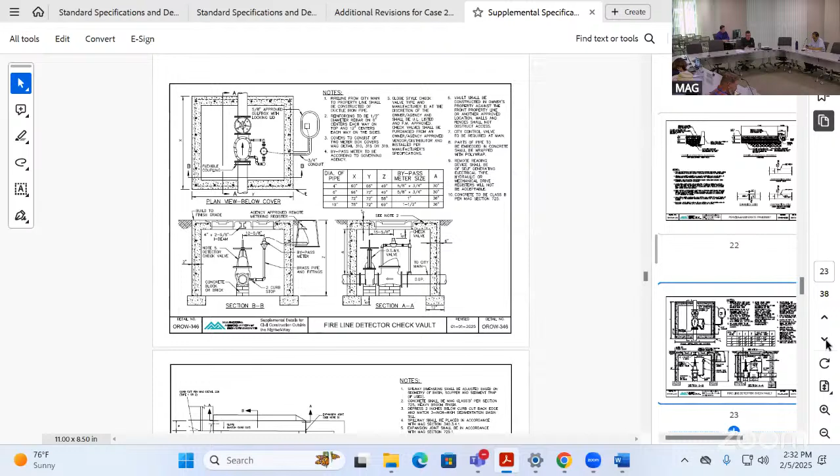I'm not hearing any. Gordon, this is set up for action, correct? Yes, we've got it on the agenda for possible approval of the document for publication and distribution. Okay, so with that being said, I personally think this is ready to go. I've went through it, I'd like to see this thing published. And that's why I'm giving the committee members an opportunity to voice any concerns or opposition that they may have before I move into asking for a motion to approve. So any of the committee members have anything they want to share regarding this supplemental specification?

Mr. Chairman, this is Dan Nissen with City of Peoria. Can you hear me? Barely. You're a little echoey, but I think I can hear you. This is City of Peoria, you said? Yeah, this is Dan.

I apologize that you can't hear me very well, but I was wondering what is our public information process to notify people that this publication will be available on the MAG website, and what is the purpose of it? How are we planning to get the word out?

It's a great question. This is Gordon. MAG has a mail list with over 2,000 people who have signed up to receive notifications relating to specifications and details, so I would send it out to that group for sure. It would also be handy, once it's posted online with that particular link, to send it to the committee, and then you could forward it on to people in your agency or other contractors who you think would want to use it. Any other ideas on how we can get the word out on this document would be useful.

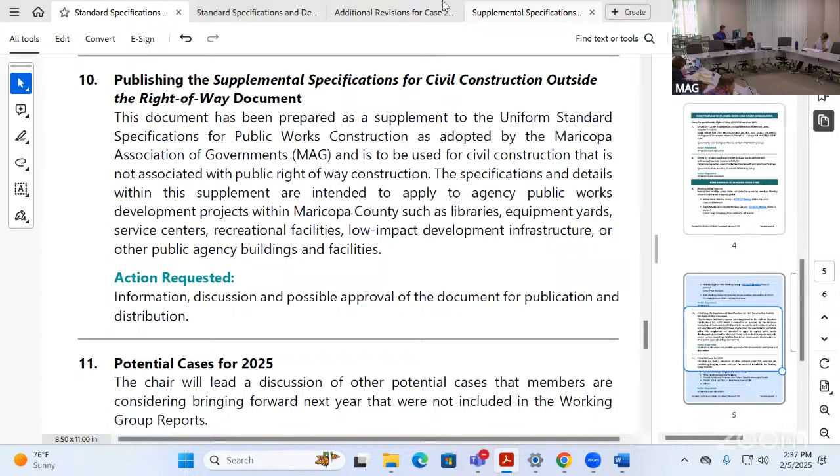All right, we'll move into agenda item number 11. This is potential cases for 2025. There's updating the spillway, the PEXa, all the ones we discussed. There's a new one that I'm proposing, which I'm going to bring as an actual case to the next meeting. That's going to be the details that Jim Badowich alluded to, the 303-1 and 303-2 for joint restraints on ductile iron pipe.

Really, the motivation here is not to reinvent the wheel, but to verify the pipe lengths and the restraints, to make sure the numbers, calculations, and assumptions still stand and are still somewhat conservative so we don't have problems further down the road. I don't know the last time those calculations were looked at or who even came up with them. Just some quick background on that.

I'm working with US Pipe currently, and in a separate effort I'm working with DIPRA, who has a joint calculator, a very in-depth joint calculator on their website. They're both separately and individually reviewing these details to evaluate that joint distance.

The other intent is to clarify LRN. Some of us know what LRN is, some of us don't, some of us need to be retaught what LRN is. It's always a point of discussion whenever that detail comes up, so we'll make sure the table leans on the conservative side of things. And of course, there will always be that note at the bottom of the detail, note 4, that basically says the joint restraints can be shortened with supporting calculations from the engineer. But I think this detail is important to have; we just need to revisit it and make any minor modifications.

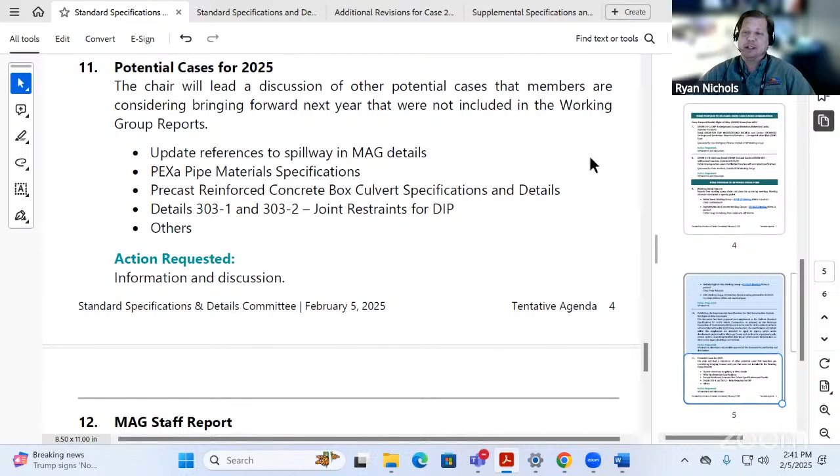I appreciate that input. It's not formally a case yet, but it will be at the next meeting. I'm just trying to shortcut it for you and help you get to the end faster. Thank you. Ryan Nichols, since you have a strong interest in this, I'll make sure to keep you included in the correspondence.

Mr. Chairman, while you're at it, the other thing, if you're talking about cases, if there is a bend within the restraint length, should the restraint length carry it through the bend? Do you still need it if there's another connection in there? There's more pipe restraint holding that section.

Okay, so what I'll do is take a note on that, get some marks on paper, get it in front of the working group, and then share it with the entire committee to look at as well, and we'll start making comments off of that. I'm not in any rush to get anything through this year, so we have time, but we definitely need to look at it. Those comments that Jose and Ryan brought up, we definitely need to explore as well.

So next you'll see that as an actual case at the next meeting. Gordon, if I can get a case number from you for that. Any other potential cases for 2025?

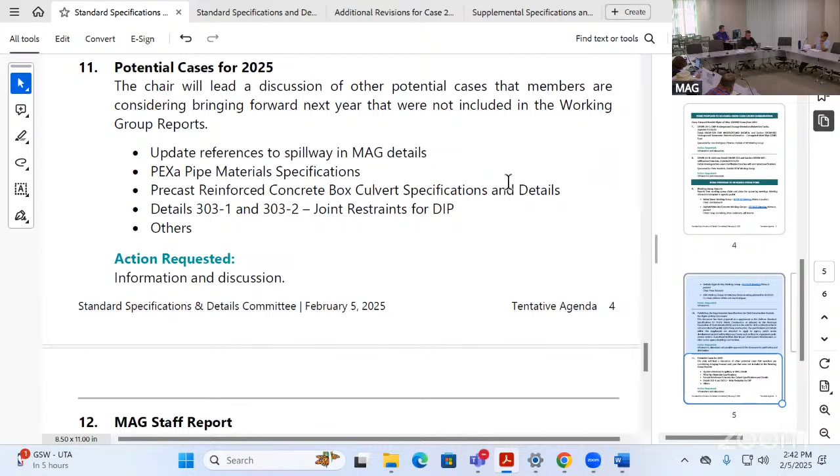All right, hearing none, we'll move into agenda item number 12. This is the MAG staff report. Gordon, do you have any report you want to provide?

Just very quickly, yesterday I sent out an email with the mail list. I've already received comments from several members, but if you haven't looked at it yet, please review and send me any corrections to your contact information, and also any updates to the Public Works Directors list, which includes the Public Works Directors and city engineers who need to review the final specs and details at the end of the year. The only other thing is, for members here in person, if you haven't picked up your copy of the MAG specs and details, there's a few copies in the box on the table. You can grab one on the way out.

Thank you, Gordon. All right, we'll move into agenda item number 13. This is information and discussion based on general discussion, topics of interest relating to specifications, construction practices, or other construction technologies. Would anybody like to discuss? It's open for discussion for anybody who wants to bring anything to the committee.

All right, hearing nothing, we'll move into agenda item number 14, requests for future agenda items. Are there any requests from committee members for future agenda items? Paul? No? Okay, hearing none, we can move on to agenda item number 15.